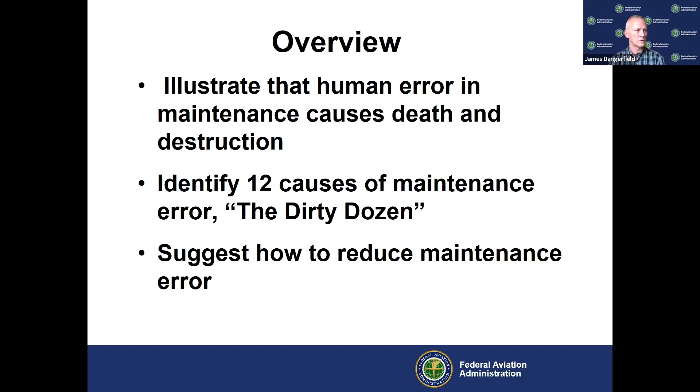And I got to give Guy Minor credit with the FAA. He actually created the Airplane Dirty Dozen presentation, and like I say, I just stole from him and used his format. I did some really good accident investigations though, to kind of make it interesting and to get everyone involved.

So this first slide, it's basically saying I couldn't find a picture of anyone ejecting out of a helicopter, so I had to use this fixed wing example. Human error is both universal and inevitable. This means everyone will make a mistake sooner or later. In fact, the best people often make the worst mistakes. When learning of an accident caused by human error, it's common to think the person involved is somehow deficient in skill or character, while we, on the other hand, are well-meaning, motivated, experienced technicians. We just wouldn't do something that stupid. When we think in these terms, we discount the moral of the story and miss the lesson in it.

This is a picture of a spectacular accident caused by human error. The pilot started the loop about 1,000 feet lower than he should have been. Before takeoff, he set his altimeter to his home base. Even though this mistake was slight, setting the wrong altimeter setting, the outcome was tragic.

So here's my question to the audience. Does the Air Force select mediocre pilots for the Thunderbird demonstration team? No, not likely, they choose only the best of the best. So why is this person making this mistake? Well, the Air Force selects people that are the best at their job to fly on the Thunderbirds, so they pick them to do the riskiest jobs. The point from this can be taken that you can be the sharpest person on your crew, but if you had a sleepless night or someone doesn't give you vital information, then you may make a mistake. And sometimes even the slightest mistake can be bad.

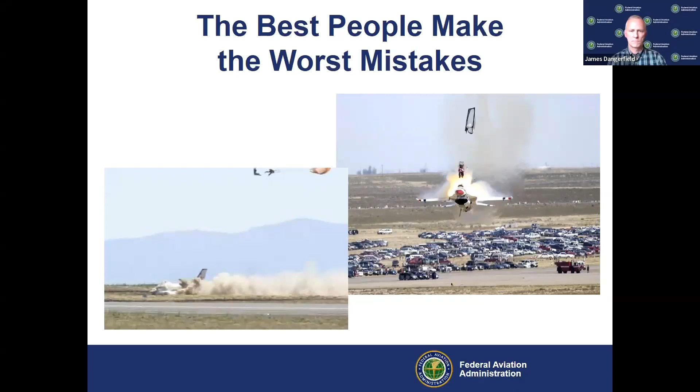Okay, next slide. Okay, so maybe I did find an actual picture of someone ejecting out of a helicopter. Well, you can look at this picture and tell it's been doctored, it's a fake, it's not real. The door's still on the 206, so I don't think he really ejected. This is an April Fool's joke from a website called Rotor Floater.

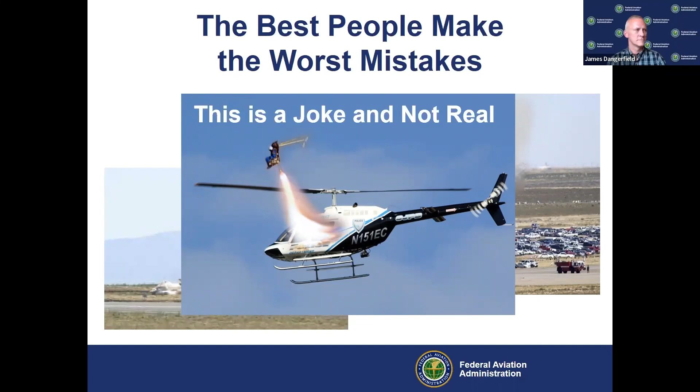Okay, here's where I'd like you to take a screenshot if you could. What Dan mentioned earlier is I'm a member of this group called the Rotorcraft Collective. It's not just FAA, it's industry partners. This picture here is actually from a company called Rotorblade down in Georgetown, South Carolina. They actually have the saw blades that hang beneath the helicopter and cut power lines. So they were nice enough to provide some pictures for this video series.

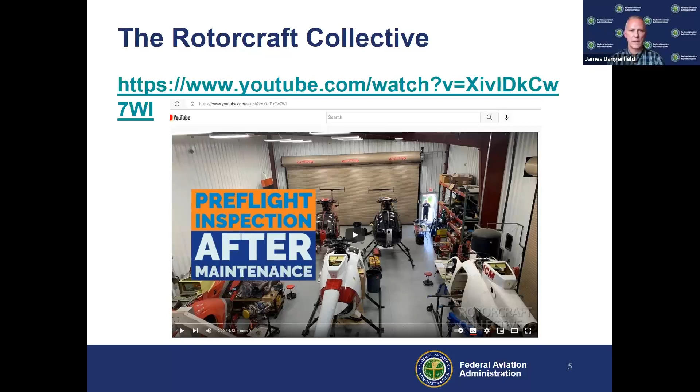But please go and watch this, this is great for pilots and mechanics. This is actually one of the more popular Rotorcraft Collective videos, and I think it's because people are starving for information on maintenance. We do get a lot of information on pilots, but I think this series here is really interesting. And of course, it's called Pre-Flight Inspection After Maintenance. That also goes into an accident case study to try to make it interesting.

Okay, so here are the helicopter Dirty Dozen, which are based off of the fixed wing Dirty Dozen. These are an example of a process came up with by Gordon DuPont working with Transport Canada. They went in and tried to figure out all of the human factors errors that people make, and these were the ones they came up with. Now, you may have more than these 12, but these are an example of ones that we're actually able to identify a lot of accident causes by.

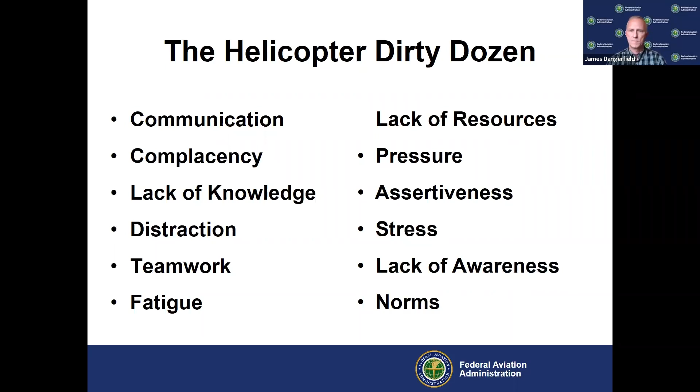Okay, this is our first accident case study. I'll read this one because it's key. On July 28, 2010, at 1:42 p.m., an Air Methods Corporation American Eurocopter AS-350B3 medical helicopter, November 509 Alpha Mike, during a VFR flight under Part 91, descended rapidly and collided with terrain in Tucson, Arizona. The aircraft was substantially damaged and consumed by a post-impact fire. The pilot and two medical flight crew members were fatally injured. The repositioning flight for engine coking maintenance originated at the Marana Regional Airport in Tucson, Arizona at 1:32 p.m., and the intended destination was the Air Methods base in Douglas, Arizona.

A couple things I want to mention about this accident. I used to work for Air Methods, and it's a very professional organization. All of the case studies I did here are very professional organizations where the holes in the Swiss cheese just lined up perfectly for that day. There were a lot of errors that took place that caused this accident. Just understand they're very professional organizations trying to do a job in a good and safe manner.

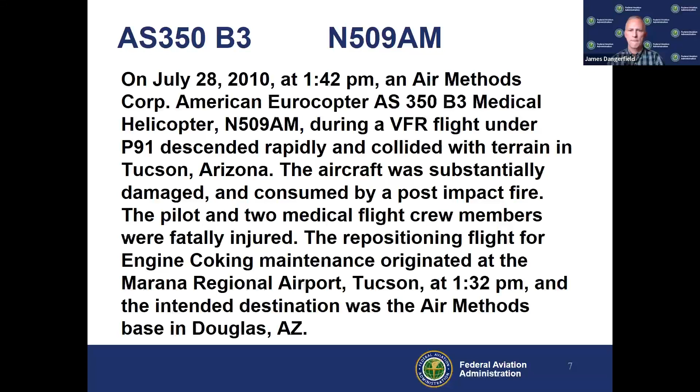This is the actual accident aircraft. It was hard drumming up this picture. The NTSB actually helped me out with some of this information. This is an aircraft I'm very familiar with. I used to be a relief helicopter mechanic for Air Methods in Columbia, South Carolina for about 14 years.

And of course, this is the accident after it happened, because you're probably thinking they probably auto-rotated, but how come they didn't make it? We'll go into a little bit of description of that in a few minutes.

They did an external examination of the engine at the accident site, and it revealed that the fuel inlet union was detached from the boss on the compressor case. The fuel supply line remained attached to the union and the hydromechanical unit via the adjusted valve. The intermediate gasket was located in the fuselage debris directly below the union. And as I mentioned, this is what the accident looked like at the accident site.

So let's go in and look and see what caused this accident now that you know what the primary cause was.

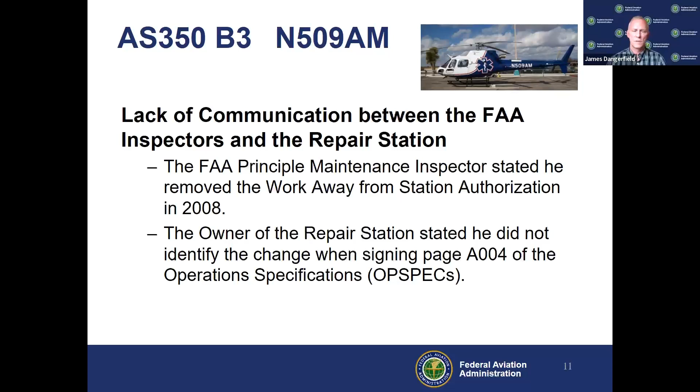So what this document is saying, in shorthand, is that this operator can do quick, easy maintenance in the field — examples include changing a tire, replacing bulbs, minor maintenance in the field with their repair station. But it does state they can perform work at a place other than its fixed location if issued these op specs, provided it has the facilities, material, equipment, and technical personnel to perform work authorized in the following table. Again, this is small, quick maintenance for small operations — but they were doing heavy maintenance in the field, which is what we're going to get into.

So that one is a lack of communication, of course.

Not too much as far as a contract. It's not like when you buy a car where you have 20 pages. The FAA tries to make them simple and short.

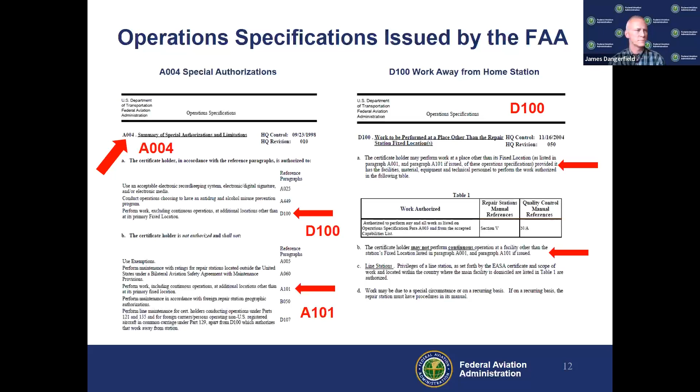So I like to define this one. Complacency is caused by a lack of sufficient stress. We hear stress is bad for our health, and too much unresolved stress certainly is. However, we need a moderate amount of stress for optimum performance. While too much stress causes confusion and fixation, too little stress can be a problem as well. It can cause a person to be bored and complacent.

I use the example of if someone's sitting in their basement watching TV and they don't want to get a job, that's complacency. They don't have the drive to get out there and get that stress of getting a new job, doing something unfamiliar. So that's a good example of complacency.

So just remember that, complacency. Okay, let's get back into this accident investigation.

As a Turbomeca service center, Helicopter Services of Nevada, which was a repair station doing the maintenance for Air Methods, provided levels 1, 2, and 3 maintenance, service parts, and tools. The Turbomeca Service Center technicians completed a Turbomeca design checklist and engine build form when performing field maintenance.

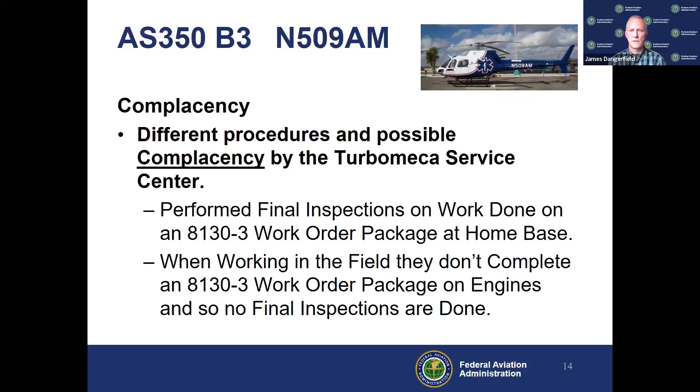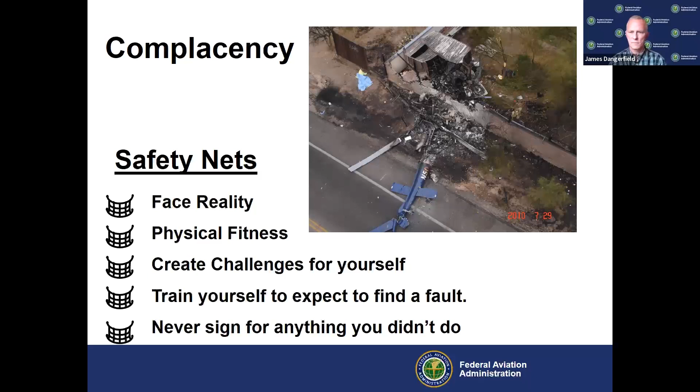Okay, next up is lack of knowledge. It may seem lack of knowledge is about being inexperienced. However, the rational point of view is that aviation is incredibly complex. No one has all the answers. We all lack knowledge in tasks that were not familiar to us.

Even experienced people need to refer to updated manuals and ask questions. I learned this in my early career. Be modest, ask a lot of questions, learn from those experts and make them into mentors. That is really the best way to learn. And that applies to pilots and mechanics. Go to someone who's successful and does a really good job and try to learn from them.

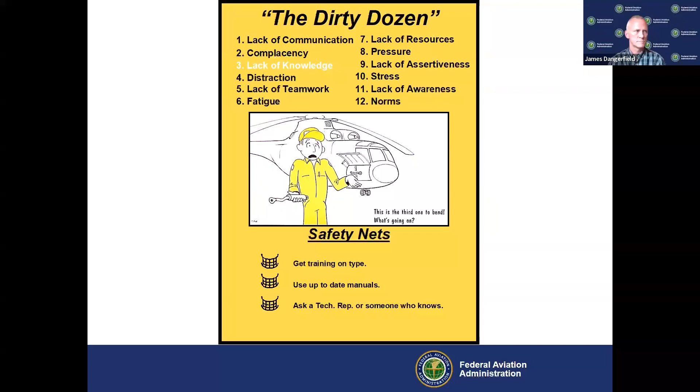Okay, lack of knowledge, we're going to hit the pilots up on this one. So after all that heavy maintenance was done, the maintenance test pilot went out and did a ground run of the helicopter. After the ground run, they found out the engine's hydromechanical unit was found to be leaking. The next day, they fixed the leak and the pilot performed a ground run.

They have a digital system that recorded his run called the AVL hub interface. And then he did his flight, and that was also recorded in the AVL hub interface.

When they checked the AVL hub, because I don't think he documented the maintenance test flight in the logbook, they found out that took approximately 7.5 minutes.

They went to the Turbomeca service experts that were part of the accident investigation and asked, what is required during an actual maintenance test flight after doing this engine coking repair? They said, by the manual, you should do a hover flight check, a max continuous power climb, a max takeoff power check, and a max continuous power level flight. They estimated it would take around 30 to 45 minutes to do these actual things.

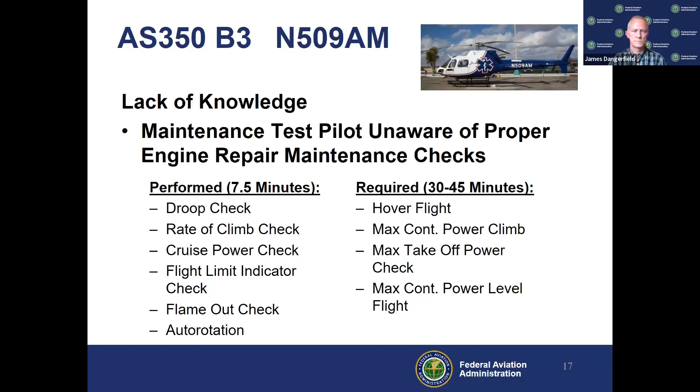You got to put yourself in the shoes of the maintenance test pilot who test flew this. He was probably trying to save the company money by saving hour cycles and fuel costs. His motivation was in doubt, and his method leaves a little bit to be desired. So always make sure you follow your checklist.

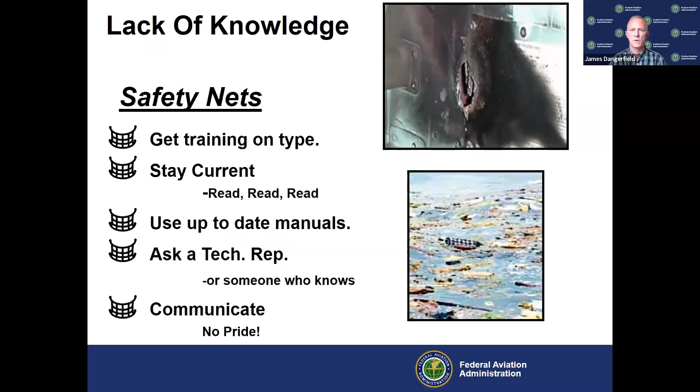Okay, next up is distraction.

Does anyone out there happen to have a cell phone nearby? Mine are all on mute, but they do go off while I'm doing these presentations and vibrate. Of course, you can't hear it on your end, but cell phones are a distracting feature of our culture. When you're driving, listening to a speaker, or maintaining aircraft, it can really be disastrous if you get distracted by a cell phone. That's just one good example we have to be very careful with.

Okay, here's another example. On September 16th, 2017, at about 4:35, a Bell 206 Long Ranger 3 helicopter, November 213 TV, or Tango Victor, impacted terrain near Ancho, New Mexico. The pilot was the sole occupant, was fatally injured, and the helicopter was destroyed.

It was a flight that originated at around 3:54 p.m. from Roswell International Air Center Airport in Roswell, New Mexico, and his destination was Albuquerque International Sunport.

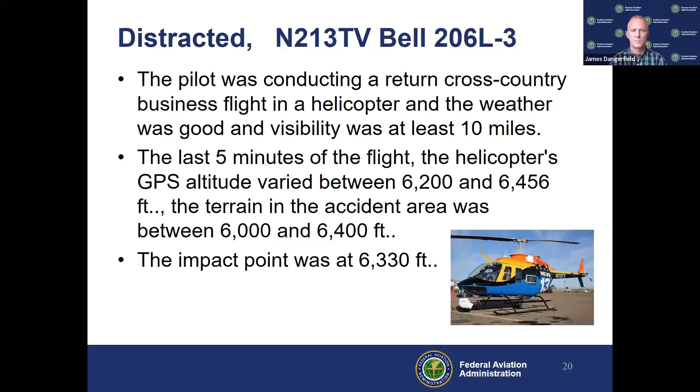They went and did the accident investigation, all the NTSB, the FAA, and all the other parties to the investigation, and they just happened to find his cell phone. It actually was able to be downloaded and accessed.

They found out from this phone that he made a phone call at 4:12 p.m., while he was flying the helicopter, and he called a rental car agency. Now, I will tell you, this was not wired into the aircraft. This was a loose cell phone that he called while he was flying this helicopter.

So they went and talked to the rental car agency lady and asked, do you remember this call? And she said, sure, I remember that call. She added that she could not tell he was in a helicopter, but he seemed busy or distracted. As they were talking about a future rental, and she was mid-sentence, the line was disconnected.

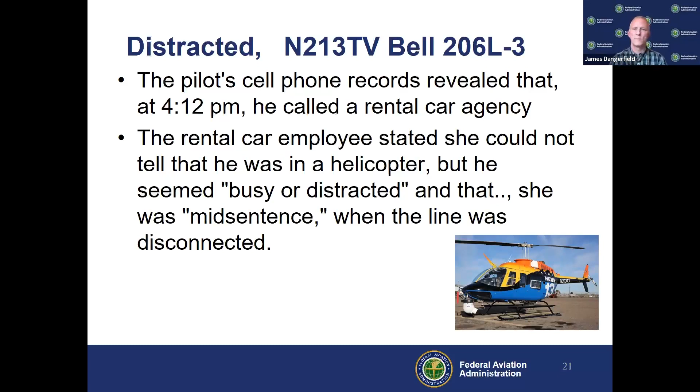So she noticed he was busy or distracted. And guess what? Based on that call, the pilot was likely using his cell phone during a low altitude flight and became distracted, which resulted in controlled flight into terrain. This pilot was very low to the ground when he got so distracted by his cell phone that he flew it right into the ground.

So what I'm saying here is, and this is for the pilots and mechanics, and we may have some student pilots out there, when you're flying a helicopter, you're busy. You got your right hand on the cyclic, your left hand on the collective, and both your feet on the pedals.

I'm still trying to imagine how this guy was flying his helicopter. He probably tightened down his collective friction and had everything set, but I just can't imagine trying to fly a helicopter and talk on a cell phone. That would be tough.

I would say if you do that, make sure you have an installed cellular system that you can use through your headset, with switches on your cyclic that you push to actually talk. They actually have STCs, supplemental type certificates, in case you're not aware of the acronym, which allow you to modify your aircraft for that type of installation.

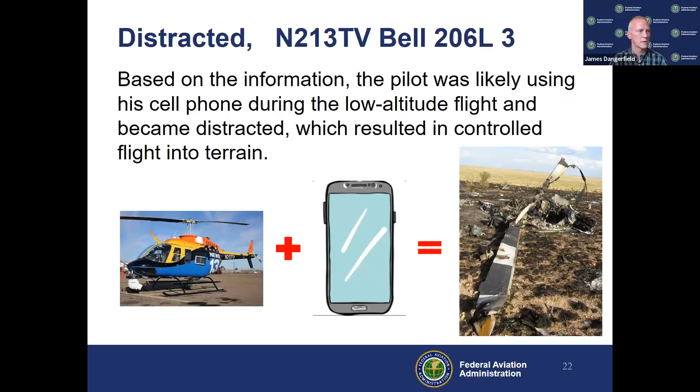And here's some safety nets when you get distracted. I mentioned a couple already. For example, if you're a maintenance guy working on fuel, hydraulic, or pneumatic lines, and you get pulled away before finishing the job, go ahead and loosen the connection completely or finish torquing the line. We've had a lot of accidents occur where people got pulled away to help someone else and forgot to tighten that line, which caused problems.

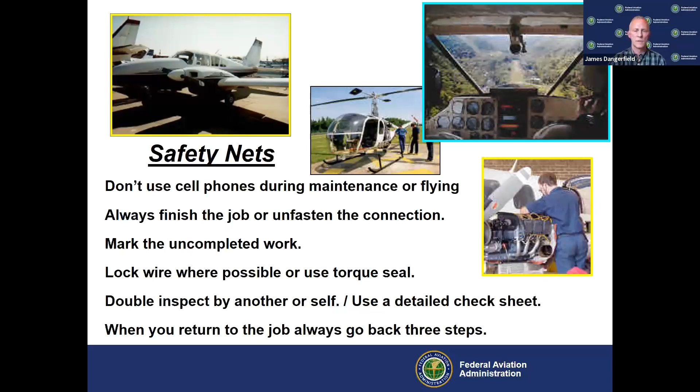And of course, there's a couple other safety nets here.

All right, the next one we're going to cover is lack of teamwork. I've been guilty of this. One time I worked with an unfamiliar team, and we forgot to tighten up a fuel line, and we had a leak on run-up. That was good because it happened before the flight, so we were able to fix it. But let's go ahead and talk about our accident case study on what happened here.

Okay, so as you see by the main bullet, lack of teamwork may have contributed to a process error. Between July 24th and July 26th, the accident engine was disassembled first, and the mechanics realized they would need additional parts and tooling to complete the work.

So just to stage this for you, you have two Air Methods mechanics and one Helicopter Services of Nevada mechanic working on that first helicopter, the accident helicopter. Well, they got to a point where they had to set the original accident engine aside, and they started working on a second aircraft. But when that happened, the Air Methods mechanics went over to the second aircraft to work on the second engine, and the Helicopter Services of Nevada mechanic kept working on the original accident engine by himself.

So the HSN repair station technician replaced the fuel manifold on the accident engine. During the work, Module 3 was disassembled, the fuel injection manifold was replaced, and the engine was reassembled by the HSN technician, including the fuel inlet union, and then reinstalled into the helicopter by the Air Methods maintenance personnel.

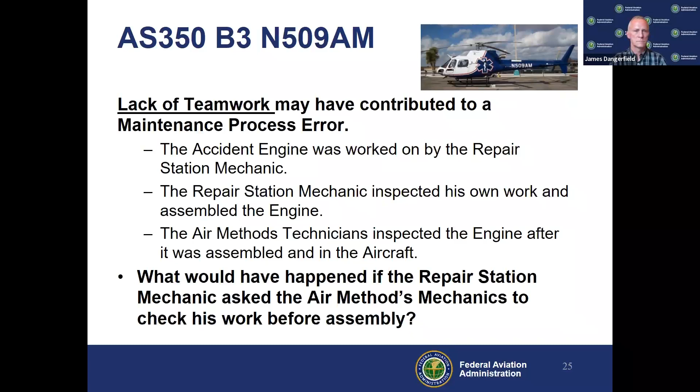Note that the bolts, screws, and nut hardware were not found at the accident site. So you know how a helicopter vibrates—it vibrated all the hardware off because it wasn't tightened all the way.

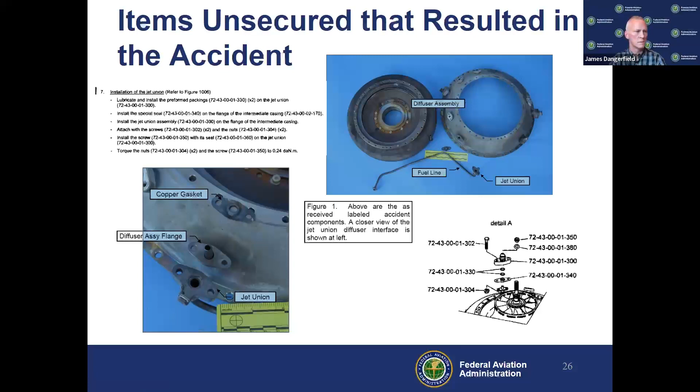You also see on the bottom right corner there's a parts breakdown out of the Turbomeca parts manual. These are the actual examples of the components that would have been there if they were all found. Those are called exemplars, so you can see the bolts, the nuts, the self-locking nuts, and of course the copper gasket. If it were brand new, that's what it would have looked like.

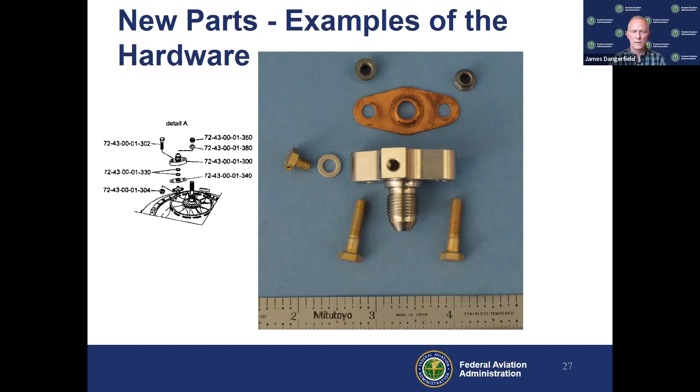So lack of teamwork, communication—team tasks require a full team. Don't be proud, be humble. Always ask for help. And here's another thing for all those field mechanics.

I know there's mechanics out there in field locations by themselves. Get the pilot to check your work before you cover it up. They might want to work on their A&P anyway, so have them go to the manual, look at your work, show them the work you did, and teach them.

It will pay off in the long run, believe me. You'll have a much safer pilot who really knows what to look at, and it'll also help you understand the process too.

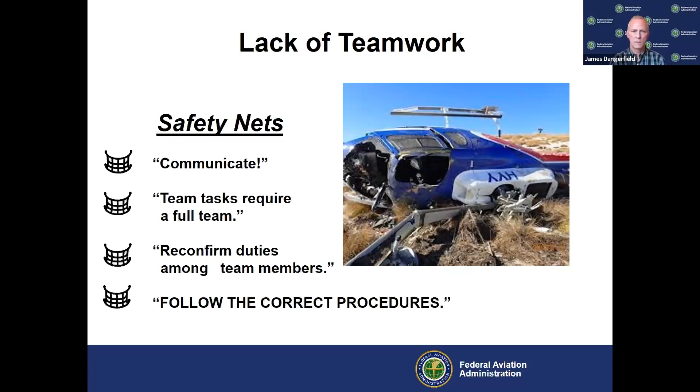Okay, next up on the Dirty Dozen is fatigue. We're going to cover some generic information here. There's 3 different kinds of fatigue by the medical community: acute fatigue, chronic fatigue, and operational fatigue.

Acute fatigue is usually where you might have missed one night's sleep. It can be, you can recover after maybe just a single rest period. Chronic fatigue means you may have a medical problem—you may have restless leg syndrome, or you may have to use a CPAP machine to sleep.

It can cause depression. Operational fatigue is where anybody works too many days in a row, gets too little sleep, and it can't be relieved by a single sleep period. I know I've worked long hours and days, especially in the National Guard, and it usually takes me about 2 days to catch up on my sleep when I've had a lot of that operational fatigue. It's probably going to be the same for you.

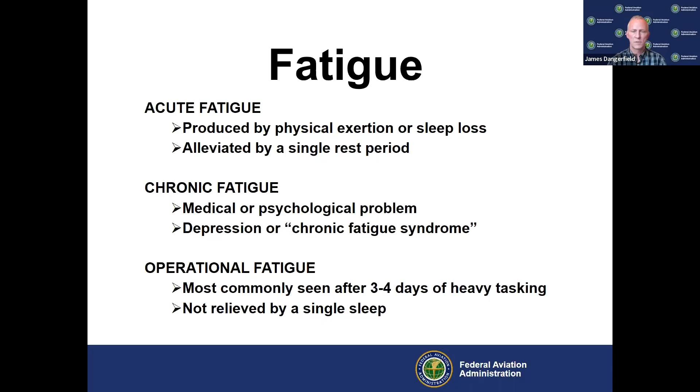The symptoms of fatigue—I've always noticed, for example, in the military, when we've been up for longer than 48 hours with no sleep, you start noticing people start slurring their speech, and all of these symptoms right here you become aware of. Usually the person who is not suffering from fatigue is the one who recognizes the person's fatigue.

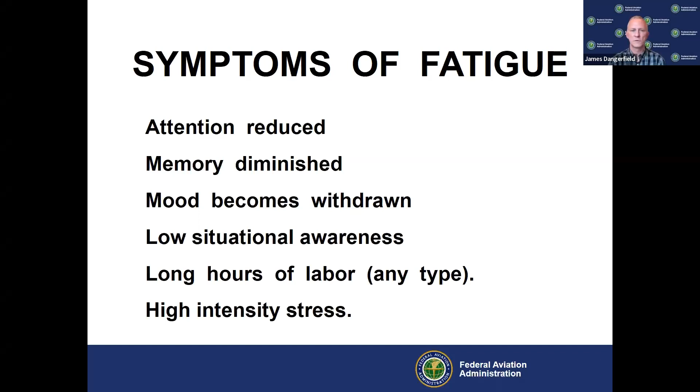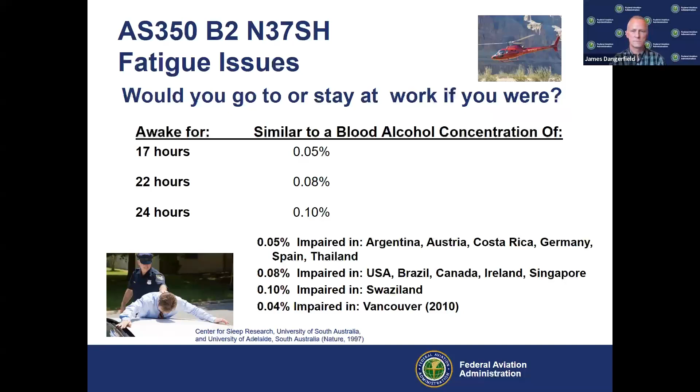Now we're going to cover this on the last couple of slides, but this was a fatigue issue that we're going to cover real quick. The helicopter you see up there on the top right corner is the helicopter that did crash.

So when they did the accident investigation, they went in and interviewed the mechanic and the inspector because they had made a serious error of judgment and inspection when they had done the maintenance.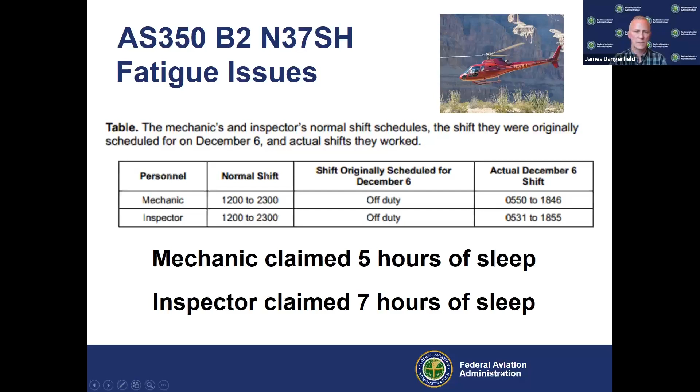The mechanic only got 5 hours of sleep. The inspector got 7 hours of sleep. And I'll cover this accident case study here in a few minutes. That's just to wet your whistle.

Circadian rhythms. So we're going to cover a little bit about circadian rhythms. The reason there's some pictures on the slide is because the Marines did a study to see if they could adjust your circadian rhythm, which is your body's sleep cycle.

The Marines did this study to try to find out if they could adjust it quickly in their Marines, and they found out with no success they couldn't modify it any quicker than the standard methods most people use.

For example, your circadian rhythm affects your biological clock. It is affected by temperature, blood pressure, heart rate, and also you'll notice people always mention when you go to a foreign country where you have to adjust your sleep, you need to go out in the sunlight because that helps adjust your circadian rhythm.

In this slide, you'll notice in the green chart, your best time to work is from 8 a.m. until about 4:30 p.m. That's when your performance is at peak. When you get into the midnight hours, your performance goes way to the bottom, as you notice by the arches there.

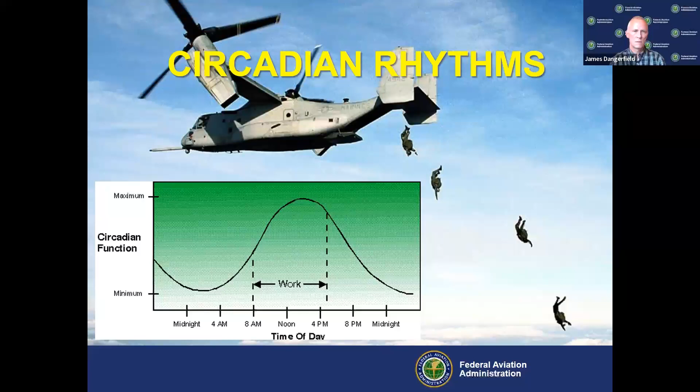So fatigue, here's some safety nets. Be aware of the symptoms and look for them in yourself and others. And I'm going to skip around here, look at the bottom, ask others to check your work.

Next up is lack of resources. We're going to go back to our original accident investigation on that one. Of course, resources are money, which affects your parts, people, time, tools, and data. Those are all resources that you need at your disposal when you work on an aircraft.

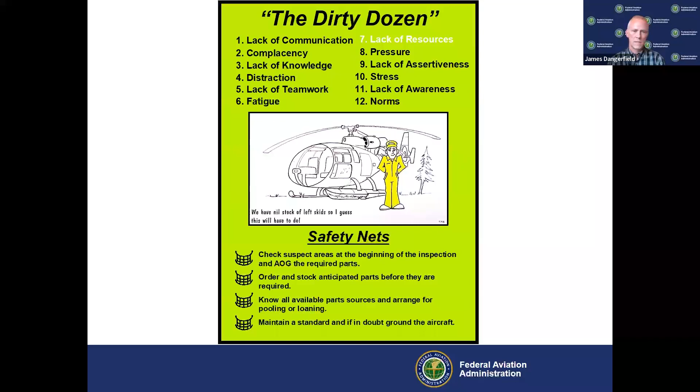There's your safety nets at the bottom. You're going to notice these safety nets were not followed in this accident. For example, if your aircraft is down, order the parts ahead of time. Those are great safety nets for this accident.

Okay, so back to the original accident investigation. Lack of resources may have contributed to a maintenance process error. If you'll remember my description earlier, I mentioned to you that the accident aircraft was disassembled by all three mechanics. But guess what? They realized they didn't have the parts or tooling to complete the work.

So they set the aircraft accident engine aside, and the HSN technician continued to work on it while the Air Methods mechanics went and worked on a different aircraft. So if they would have had all the parts and tooling available, they could have finished that first job on the accident aircraft as a team.

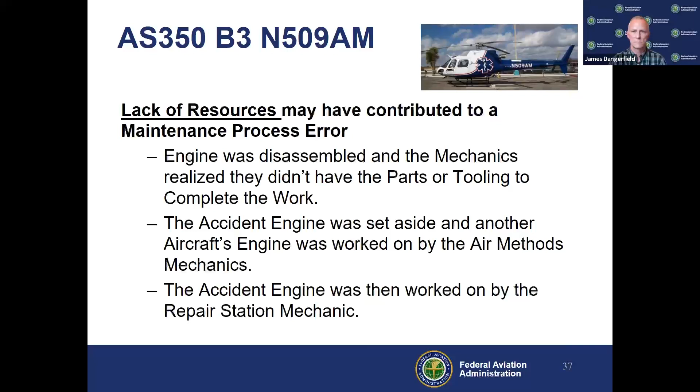So I'm going to say lack of resources leads to a maintenance process mistake. Again, another slice in the cheese lining up. The good question we all need to think about at the bottom is, what would have happened if they had the correct resources? And we kind of just reviewed that.

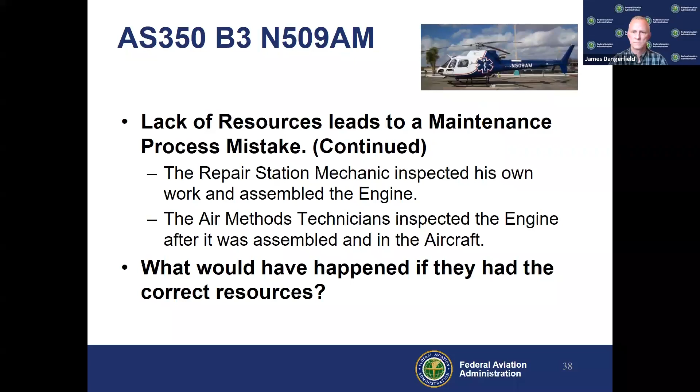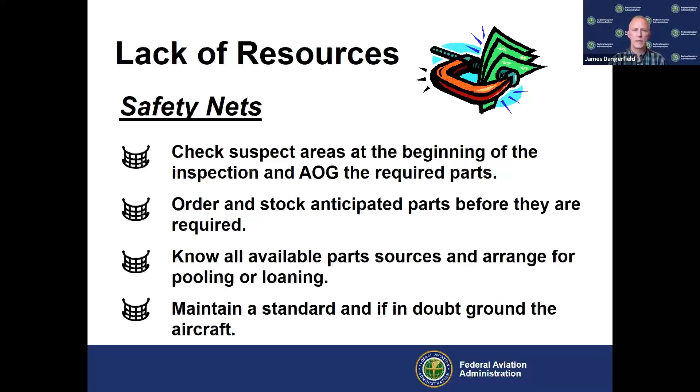There are your safety nets for lack of resources. Again, that first one would have affected this event if they would have done this ahead of time. Now it is hard sometimes to always know what you need, but if you're able to know what you're doing, like engine coking, you should be able to go in and look at the maintenance procedure and figure out what to order.

There's your safety net for pressure coming up. Just to make you aware, a certain amount of pressure is appropriate, but too much pressure can cause a technician to make a mistake. If there's a generic hazard in aviation maintenance, it would be pressure to produce.

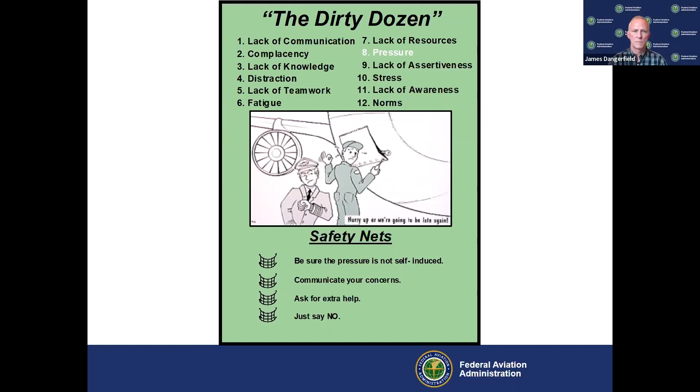Pressure causes a drift to dangerous methods. Back to our original accident case study, the mechanics felt pressure after the first engine run up after maintenance.

When they did the accident investigation, they interviewed the pilots and found out that the Air Methods chief executive officer was coming in for a visit. The base was out of service, and they didn't have a backup aircraft to use at Douglas.

I learned this working for Air Methods. They would take the primary aircraft, send it to the maintenance base up in Greenville, South Carolina, but they would bring a loaner in, and we would move all the medical gear over to the loaner aircraft to cover as a backup until the original aircraft had all the maintenance done. That's just the same thing they were trying to do here, but they couldn't because they didn't have a backup available.

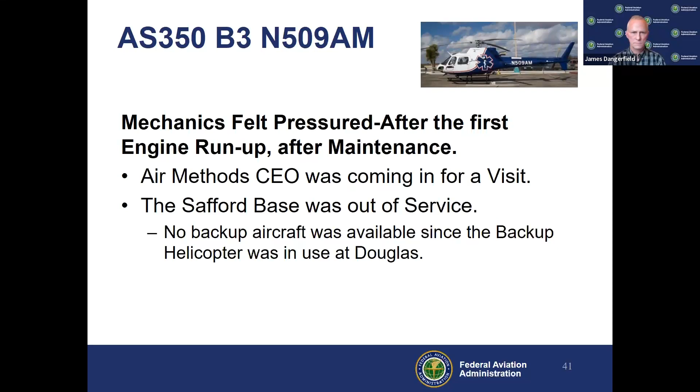Here's the statement from the Air Methods Area Aviation Manager: there's some internal pressure on pilots and mechanics because they know if they're not getting enough flight volume per month, for example 10 or less, then their base may be considered for closure. All the bases in the southern Arizona area were doing okay though, so this might have been a pressure item, but not necessarily. It's all what the person perceives.

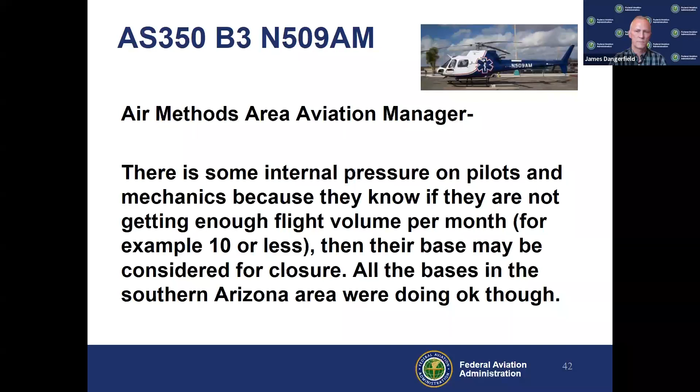Okay, here's your safety nets for pressure. Be sure it's not self-induced. Communicate your concerns, ask for extra help, or just say no.

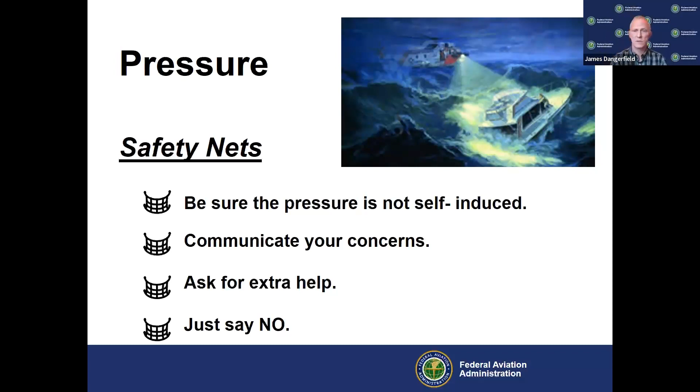Next up in the Dirty Dozen is lack of assertiveness. Mechanics as a group are not as assertive as we could be. We like to fix the airplane or fix the helicopter and leave the conflict to the managers. We have a can-do attitude, and we really do.

These are some pictures, not to do with helicopters of course, of accidents that were caused by people not being assertive, okay? The top right is Tenerife, Spain, where the two 747s collided because of some communication errors and lack of assertiveness.

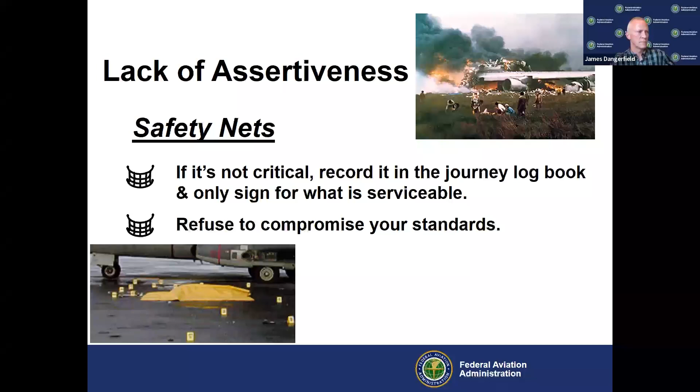Next up is stress. Stress is a blessing and a curse. We need it—like I said, we need it to pressure us to do things that need to be done, and we need a little bit of stress. We don't need too much.

Here's a U-shaped chart that is exactly the same as the one we just covered. You want to be in the middle. You want a moderate amount of stress, and you want high performance.

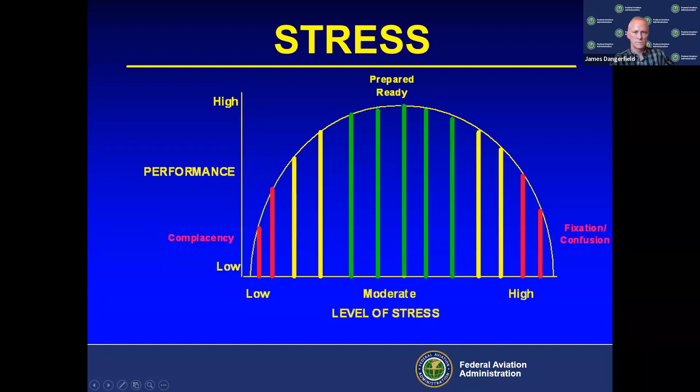Here are the symptoms of low stress: complacency. And over on the right side of the chart, you see fixation and confusion.

Here are the safety nets for stress. I'm going to just mention this one to everyone because I love this one as a helicopter mechanic: the fourth bullet from the top, take time off or at least have a short break.

I remember working on Cobra helicopters way back in the day, and in the ammo compartment we would sit on our backs and loosen 65 screws. Back then we didn't have many drills. We usually used... not a screwdriver, I can't remember the term.

You spin the little screwdriver and take it off with that, but your arms were so tired holding that screwdriver up in the air that you had to take a break. Or you were doing something like working on a fitting that's in a really hard place to access. Usually if you go take a break and come back, you're able to put that fitting on. So those are some good safety nets there.

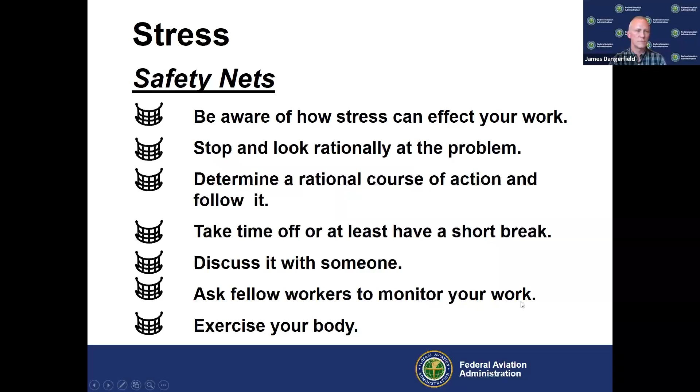Lack of awareness is the next one. Lack of awareness or reduced situational awareness can be an indication one or more of the human factors issues are in action, such as fatigue, distraction, or lack of communication.

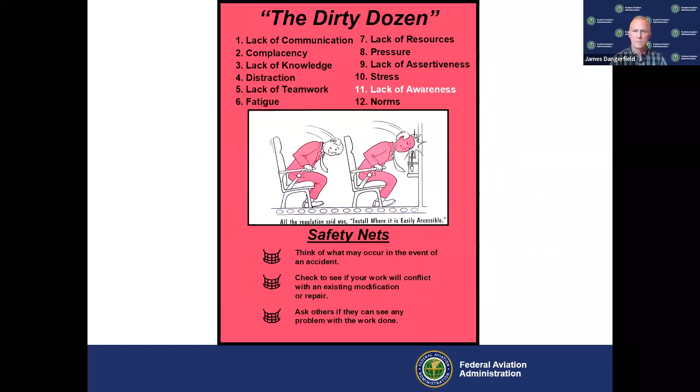Here's an example of how the lack of awareness caused some serious damage. We're going to say this lack of awareness did cause some damage, but there'll be some contention about this assumption made by the NTSB.

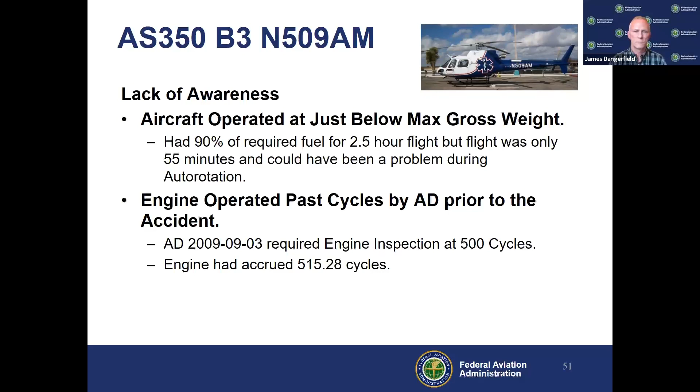Another item found during this accident, and this is the interesting part of these accidents, you find out all these items contributed to it. The rotor RPM gauge location was installed in the bottom left-hand corner of the instrument panel. Technically it would be the middle lower part of the instrument panel, the way we're looking at it here, which was non-standard according to the manufacturer.

Now, all the pilots out in the field listening to this briefing know that when you do an auto rotation, that RPM gauge is critical. You're flying the helicopter, trying to pick out a landing spot, worried about your passengers, and looking down below your left knee to see if you've got the NF and NR gauge in the right location so that you can actually do a correct auto rotation. When they did the investigation, they couldn't find any documentation, like a Form 337, showing that the instrument had been moved. So that was another one, lack of awareness.

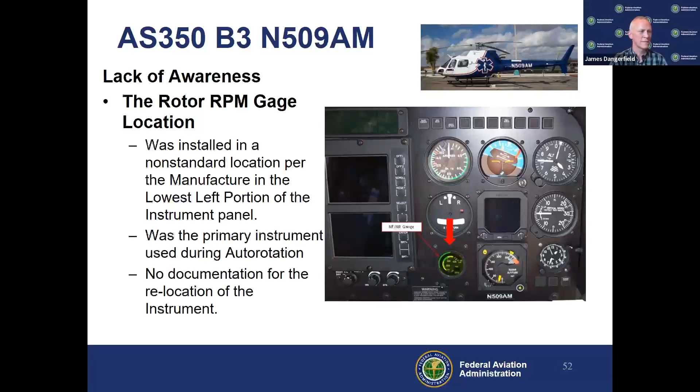Next up, we have another accident. This is a separate accident where a commercial pilot was performing external load operations in a helicopter when one of the main rotor blades separated, resulting in a loss of control and collision with terrain. The helicopter rolled downhill and the airframe sustained substantial damage.

When they did the inspection, they found 4 of the main rotor blades were fragmented into many pieces, but the 5th main rotor blade was about 900 feet from the wreckage. They found out there was fatigue cracking that had initiated near the root end of the blade. This was a circumstance, and I'll review this on the slide.

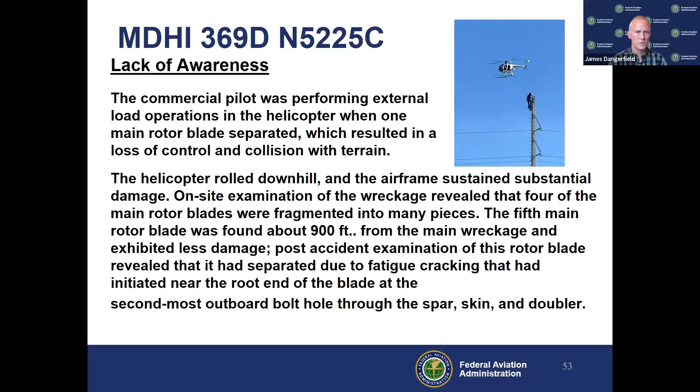The aircraft pilot had an airframe and power plant certificate. He received it so he could do the torque event inspections, which is very noble. But as we all know, when you're out remote by yourself, a company loves it when you have a pilot certificate and an A&P, because they can get one person to do 2 jobs and only pay them 1 salary.

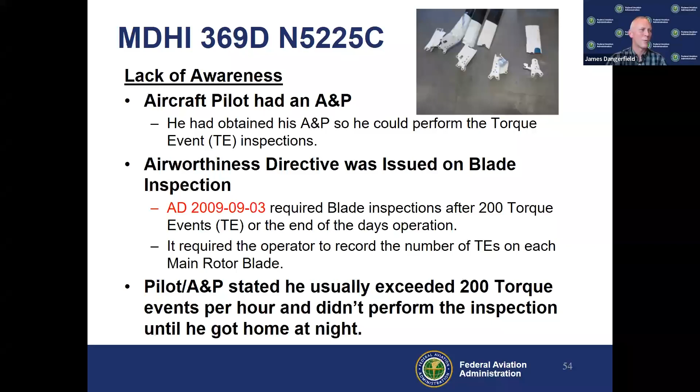In this case, the airworthiness directive said the blade had to be inspected after every 200 torque events. It required the operator to record the number of torque events on each main rotor blade. But when they interviewed the pilot slash A&P, he said he usually exceeded 200 torque events per hour and didn't perform the inspection until he got home at night. Ooh, not a good idea.

This is what the rotor blades look like. Now, it was a blessing he was in a Hughes 369 because it rolled downhill, which probably saved his life. Any other type of aircraft, they may not have survived.

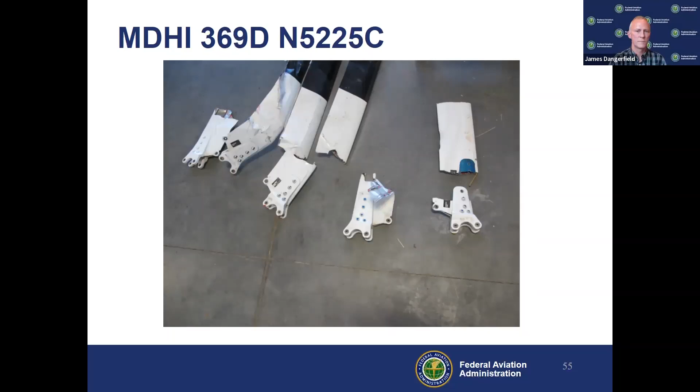Lack of awareness. Think of what may occur in the event of an accident. Yeah, this was definitely one of those deals where he could have prevented it if he was following the AD requirements.

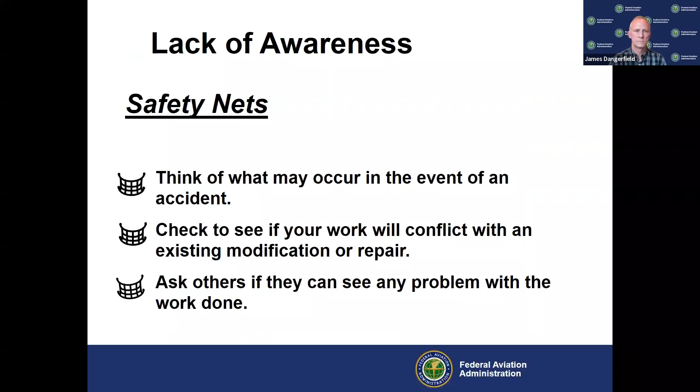And norms is the final one we're going to cover. Let's go back to the one we covered earlier about the two people who were fatigued and didn't get enough sleep. This is a tourist flight that ended abruptly. A series of maintenance errors was responsible for the crash of the Sundance helicopter, another American Eurocopter back then, now Airbus, that crashed in the mountains of Las Vegas, the National Transportation Safety Board says.

And of course, they mentioned maintenance was one of the issues that caused the accident. Here's what they said. The NTSB said that the maintenance people and the inspector failed to carry out proper maintenance, and failed to do necessary actions. So what happened?

The organization at the time, the mechanic - this is all assumptions now because I wasn't there, but from the investigation, they found out that the fore and aft servo came disconnected. And what happened was the nut just backed out, okay? And nuts don't back out unless there's a problem. Well, that's because there's a cotter pin that's supposed to be installed, and it wasn't.

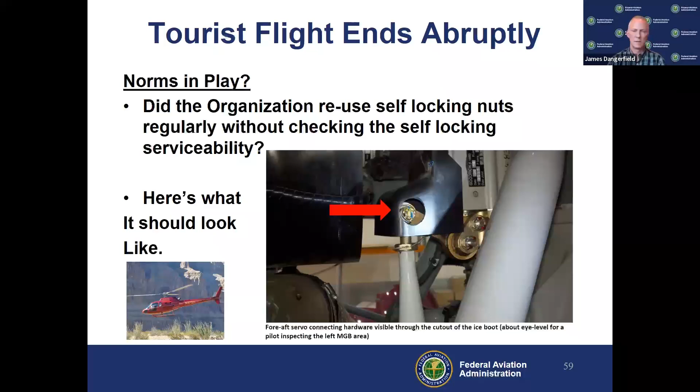You can see by this example on this slide, right there in the picture, that's the way it should have looked. Well, when you do an accident investigation, you find things that tell you what caused the accident. We'll see a picture of that in a minute.

And of course, they found out that the organization reused a degraded self-locking nut, and they did not install a split pin or cotter pin. And of course, you had an inspector who inspected the work. They mentioned the post-maintenance inspections. Now, I'm going to say the mechanic missed it, the inspector missed it, and the pilot missed it. So there's three people that could have caught that split pin being not installed.

So the contributing factors, as I mentioned earlier, were fatigue. They had a lack of clearly delineated steps for maintenance tasks and inspection, the NTSB said.

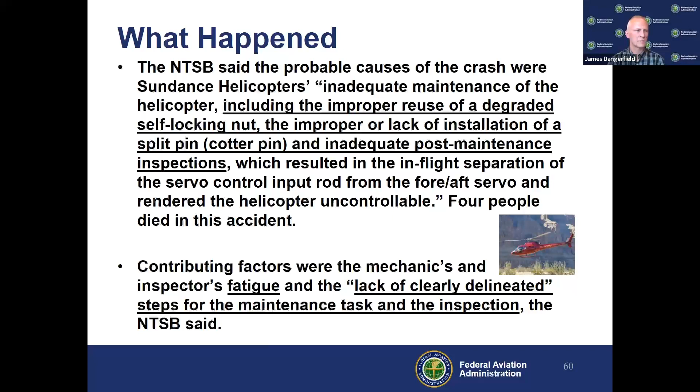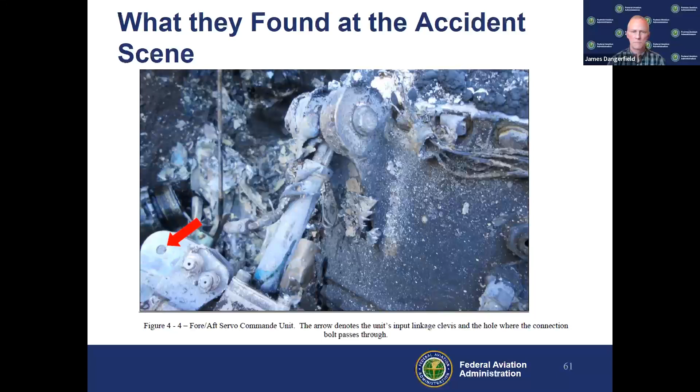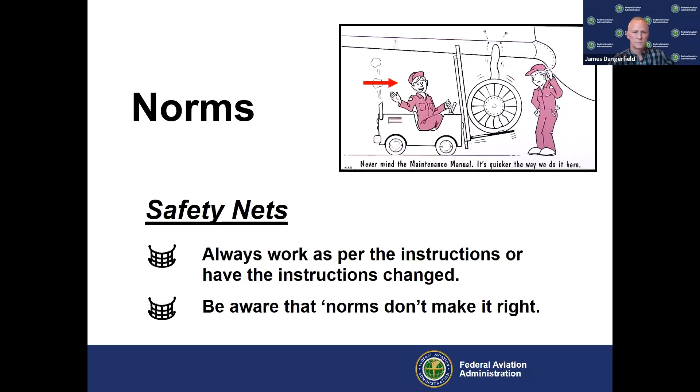There's the Dirty Dozen, in the movie that it's based on.

Face reality: what you do as a mechanic or a pilot can cause death and destruction. So make sure you're doing the right thing always, letting people check your work, and being safe.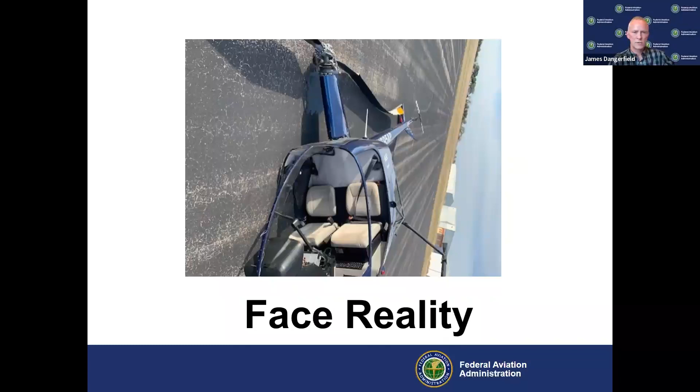The Charles Taylor Award is given to mechanics with 50 years of maintenance experience. You can either do it in the military or as a civilian. If you do it in the military, you can count 20 years of that experience towards that Charles Taylor Award. Why is he famous? Because he helped build the engine in six weeks from scratch for the very first Wright Flyer that the Wright brothers flew. The automobile manufacturer said it couldn't be done, but he did it.

Dan, that's all I've got.

Okay, Jamie, gosh, I appreciate that. That was every bit as interesting the second time I've seen this now. The first time, again, was at the VAST Safety Conference, and that certainly was an interesting event there in Dallas.

We don't have a lot of questions coming in. One of the comments I did see was the tool you were talking about was a speeder, or speed handle. Yeah, speed handle - I drew a blank on that one. I've used them. We've got a fairly significant group of maintenance guys in here, so obviously some people are very familiar with it.

Hey, the factors you just went through are literally part of our everyday life anymore. I might experience literally all 12 of them just hanging out with my family, or especially if I'm taking a drive with my family. So it really is all about context. You mentioned the fact that people can go to work, and if they're experiencing this, people can die - things can fall out of the air.